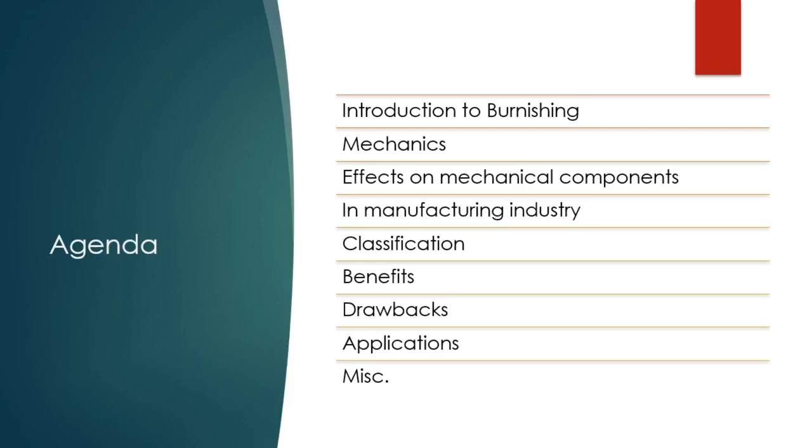All right. So let's quickly jump over to the introduction of metal burnishing. We will see some definitions and some basics of burnishing, what it is exactly. So before we begin with the introduction, let me put forth to you why burnishing has come up as a manufacturing process. Why? I mean, since it is a super finishing process, we also have some other super finishing processes like honing, lapping, grinding. Then why did burnishing come up as a process? Okay.

All right. So these recent technological developments we have seen so far are demanding good quality, superior quality products which can serve the customers for a longer lifespan. So that's the basic demand for any product in future. So the engineers have to come up with good products with better qualities, but also without compromising the production cost, because if you offer something at a higher price under the name of good quality, the customer may not be able to accept that product because he will have to pay more for this. But then again, the customer demands something good at a reasonably fair cost. So the engineers have to work a lot on this, and they had to develop processes that will serve the needs of the customers in the market, isn't it?

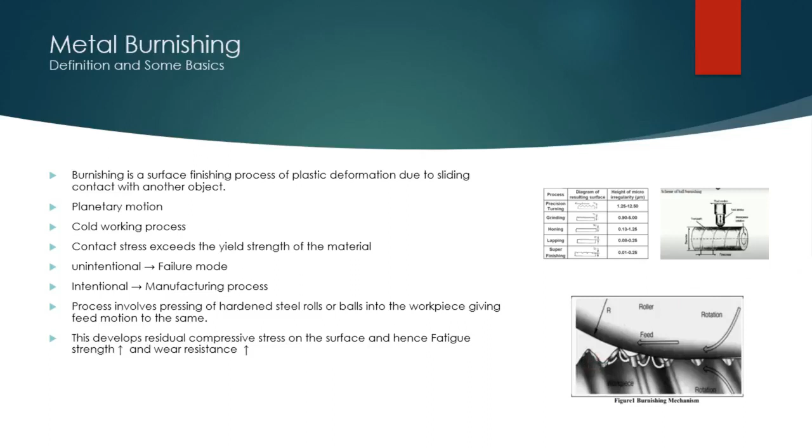Okay, let us go to the next slide. Now, since we know the basics of what exactly the metal burnishing process is all about, let us see the basic mechanics behind it. Okay, so let us illustrate this mechanics by considering the action of a hardened ball against a softer flat surface, workpiece or plate.

Okay, so if the ball is pushed directly into the plate, stresses are developed on the contact area of both the objects, the steel ball and the softer workpiece surface. Now as this normal force increases, both the ball and the plate surface will deform. This deformation caused by the hardened ball increases with the magnitude of the force pressing it, isn't it? The deformation on both object surfaces will increase with the force with which we are pressing this ball into the workpiece.

Now imagine a case when a larger force is used on this hardened ball in a normal direction. Then an indentation will be caused on the workpiece surface, isn't it? And this indentation will be surrounded by a ring-like formation of the flown material. Due to pressing, the material will flow outside of that indentation, and this flow of material will cause a ring-like structure to appear. Got it? Which is basically material displaced by the pressing action.

Now this will happen only when plastic deformation is allowed to happen, meaning the force is high enough to exceed the yield strength of this workpiece material. Only in that case will this indentation with the outer ring-like structure be seen. Now imagine another situation.

Let us take a case where the same workpiece and same ball are taken for the experimentation, but now the ball will not just be pushed down, it will also be dragged, along or across the workpiece. The direction won't matter as such over here. In the case of dragging the ball, the force will be resolved into two components: one normal to the workpiece and another tangential to the workpiece surface, isn't it?

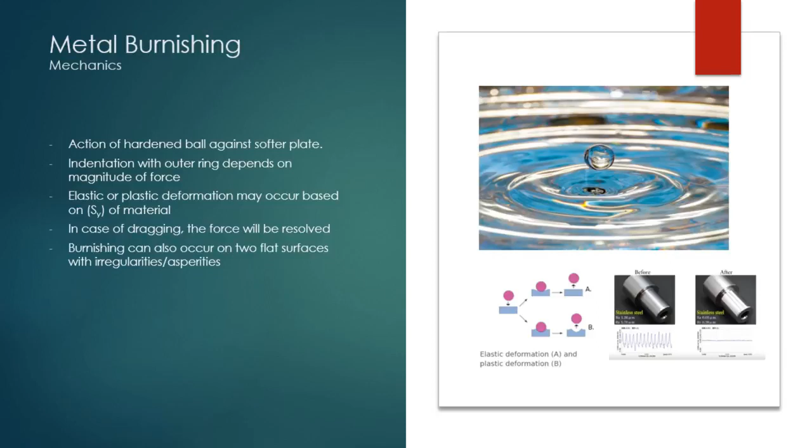So let's move on to the further part of it. What are the effects of metal burnishing process on mechanical components? Now, metal burnishing is not always desirable because it can have several unpredictable effects on the mechanical components which are in operation, isn't it?

Even a light sort of burnishing will significantly alter the surface finish of the part, and initially this finish will be smoother, but with the repetitive sliding action, some sort of grooves will develop on the surface along the sliding direction. The plastic deformation associated with burnishing will harden the surface and generate compressive residual stresses.

Now, yes, this will create a conflict in your mind, since earlier I have said that burnishing creates surface hardness or compressive residual stresses development. So it should not be a problem, isn't it? Yes, it should not be a problem, but up to a certain limit. If excessive burnishing happens, this will lead to spalling.

Now, what is spalling? Spalling is basically subsurface crack development, and this phenomenon of crack initiation below the top surface of the workpiece will eventually, over a period of time, cause the upper layer of the surface to flake off. Are you getting my point?

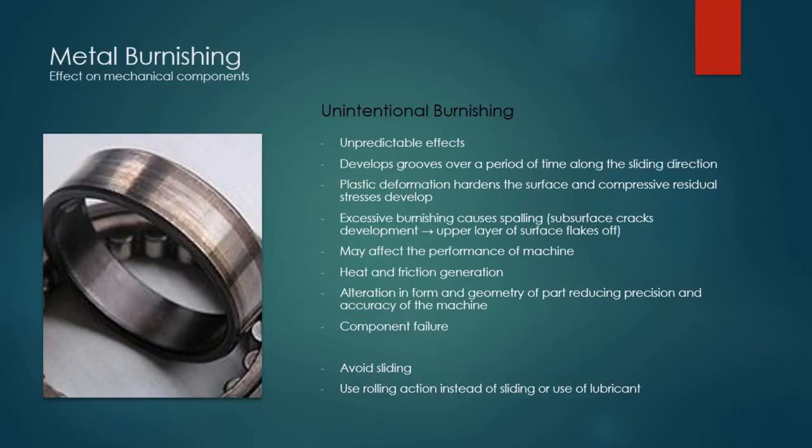Let's move on to intentional burnishing. Now, since everything has two aspects, one good and one bad, burnishing also has some good aspects. It is not always bad, but only when it occurs in a controlled manner. So when burnishing occurs in a controlled manner, it can give you a lot of benefits.

Burnishing processes are used in manufacturing to improve the size, shape, surface finish, or surface hardness of the workpieces. It is basically a forming operation on a smaller scale. To put it in simple words, the benefits of burnishing often include delaying fatigue failure, preventing corrosion, elimination of visual defects, closing porosity defects, and creating surface compressive residual stresses. These are all benefits that we get when burnishing is carried out in a controlled manner.

Now, burnishing has several forms like roller burnishing or ball burnishing. Again, the workpiece can be at a higher temperature or at room temperature. When it is at a higher temperature, the purpose is basically to reduce the wear of the tool, to have a longer lifespan of the tool. Why we need a longer lifespan of the tool, we will see in the advantages and disadvantages of burnishing.

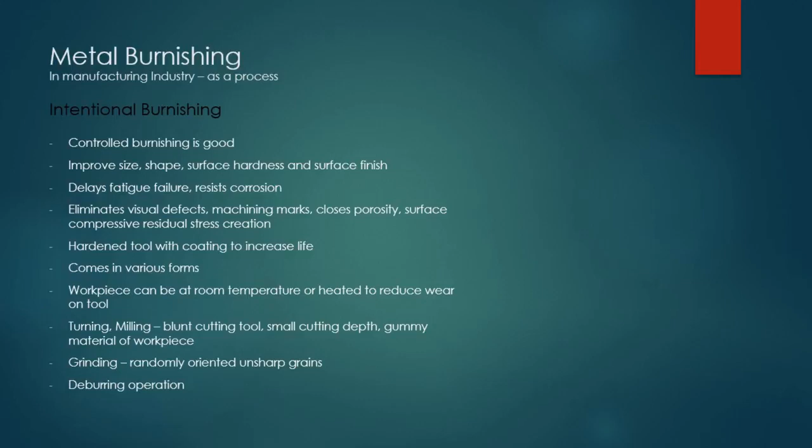Okay, so that is about intentional burnishing. Any doubts up till now? Okay, so now let's quickly move on to the classification of burnishing. It's already 45 minutes, I'm taking a lot of time, but let us see the classifications of the burnishing process. The burnishing process has two types: ball burnishing and roller burnishing,

with some minor changes in both. In ball burnishing, the tool consists of one or more spherical balls. These balls are held in a shank of the tool holder by means of hydraulic pressure or spring force, along with the corresponding reactive force from the workpiece acting on the balls. This tool is fed along the workpiece. When it comes into contact with the workpiece surface, the burnishing process will occur. The amount of burnishing depends on the burnishing force, which depends on the hydraulic pressure or spring force given to the ball.

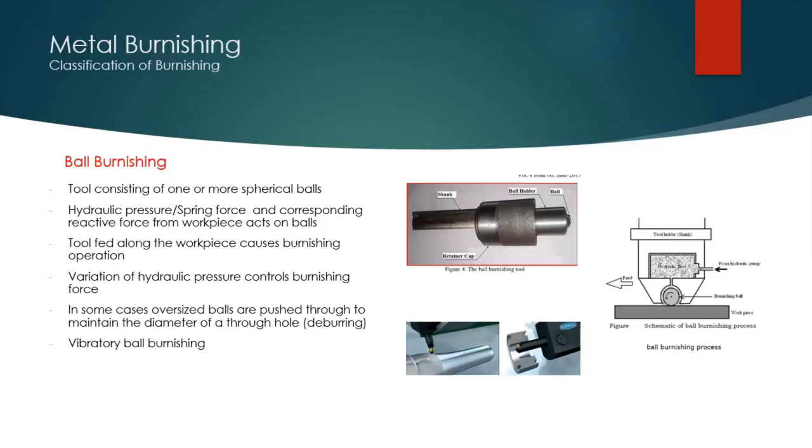Now talking about roller burnishing, it is similar to ball burnishing. The only difference is that instead of balls, rollers are used. These can be a single roller or multiple rollers mounted on a shank of the tool. The shank can be connected to the machine tool post, like a lathe or milling machine. Same as ball burnishing, when the tool is brought in contact with the workpiece, burnishing will occur due to planetary motion. So you know the basics of it now.

These rollers can be tapered, or they can also be of a form where, during the burnishing operation, they take up the shape of the workpiece itself. Hydraulic system components, shaft fillets and sealing surfaces are applications of the roller burnishing process. Using roller burnishing, close control of size can be achieved, and not just roller burnishing but also ball burnishing. So that's part of the advantage of this process.

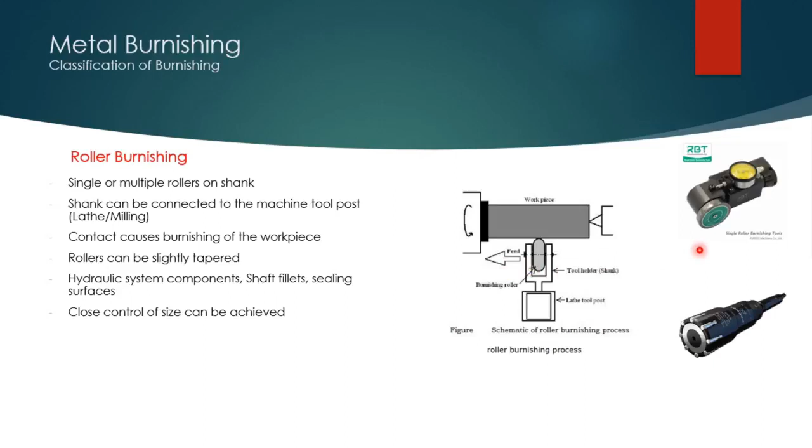Okay. So moving on to the benefits of it. On accuracy part, a fine control of the size is possible by using this burnishing process, isn't it? Parts can be produced by burnishing with high control over the dimensions, and hence very close tolerances can be achieved. Then moving on to the next, surface finish.

A good surface finish or very smooth surface finish as high as 0.05 or 0.01 microns is possible to achieve with burnishing process. Then improved physical properties, as we have already discussed, burnishing produces hard surfaces, causing them to be fatigue failure proof, wear resistant, corrosion resistant surfaces due to cold rolling operation or cold forming operation. And basically it is because of the compressive residual stresses that are induced into the surfaces of the workpiece.

Burnishing is economical in a sense that the burnishing tool can be mounted on your conventional machining equipments like lathe machine tool post or milling machine tool post, like that. So you need not remove the workpiece and then take it to some other special purpose machines, then mount the burnishing tool onto the tool post of that SPM, and then hold the job into the chuck and then carry out the machining.

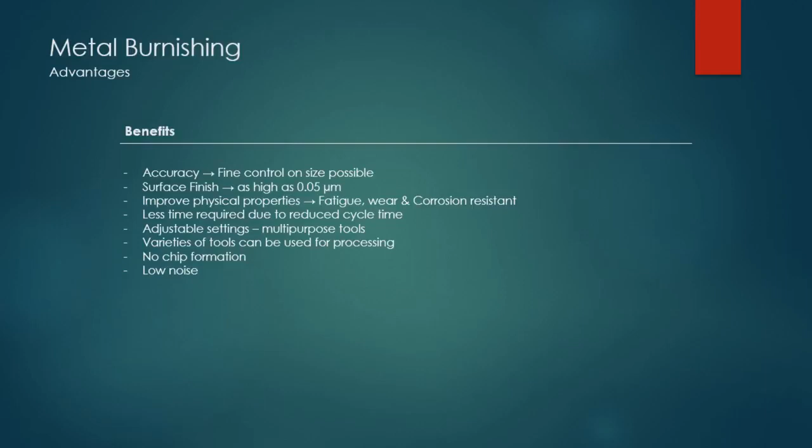Moving on to drawbacks of this process, the high initial tool cost is involved in this process because burnishing tools in some cases can be customized ones based on the complexity of your job. But nevertheless, for the tool itself, a high initial cost is required because the tools are made of special hardened materials like cemented carbides or tungsten carbide tools, diamond tools, hardened steel tools. So making up these tools with some sort of processes and good quality material will take up some initial cost. Yeah, so this is one of the drawbacks of it.

The second drawback that we were talking about is the miniature workpieces cannot be worked. So small sized workpieces which are in mass production cannot be worked. But nevertheless, due to advancements in the burnishing technique, now a similar technique is developed wherein you can also work on the miniature workpieces. You can also improve the surface finish of the small sized components also.

Another drawback that we were discussing is that thin walled components cannot be burnished because burnishing is basically a compressive force development or compressive stresses development process. And since the thin walled components may not have that strength to take up those compressive loads, the component failure would be more dominant in that case. So the thin walled or thin surfaced components cannot be worked with metal burnishing.

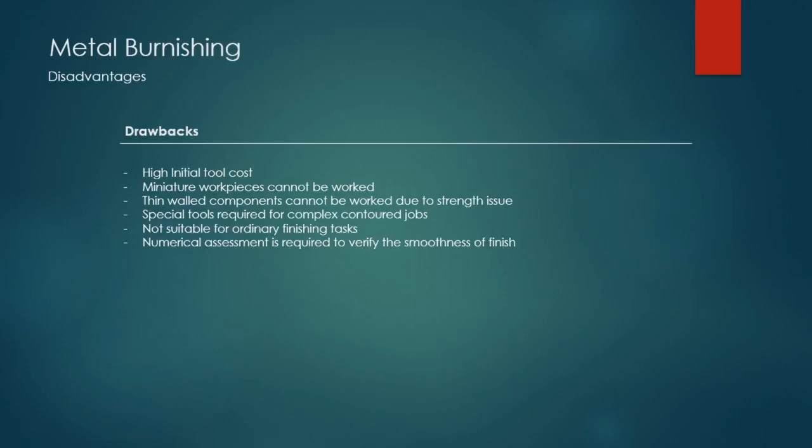Okay, so that's about the benefits and drawbacks of this. Let's take a quick look at applications of it. So industrial applications of metal burnishing process include the production of aerofoil components, components of health industry equipment, capillary tubes,

needles of injectors, like in automobile industries, the nozzle injectors have needles. The surface finish of these needles is improved by lapping process. But since lapping is a costly and time consuming process, we can think of this ball burnishing operation there in that case.

Food industry, since we require corrosion resistant components to have a quality of food to be processed in these industries, so burnishing can be one of the options in some of the components of these equipments. Turbine blades, since we need to have corrosion resistant turbine blades for their longer life, we can think of using burnishing techniques.

Cutting tools, again, to have a greater fatigue life or greater component life of the tools, we can think of burnishing operation. And as I said earlier, in roller burnishing, some hydraulic system components can be produced by burnishing techniques to have a longer life, because those components are always in contact with lubricants, and lubricants might have some moisture which can cause corrosion. So to avoid those things, we can make use of metal burnishing.